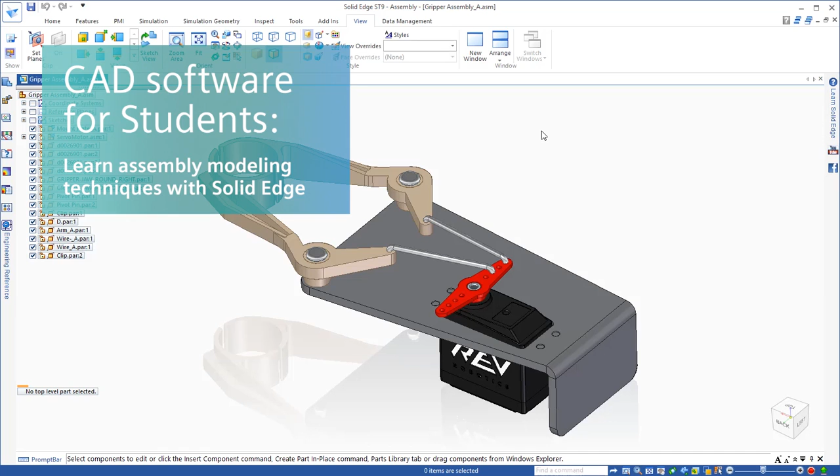In this assembly, I want to show you how we can use the power of synchronous technology to make design modifications without having to go in and out of parts. So in this scenario, you can see that I have a servo motor there. If I drag the servo motor, you can see that I can simulate the motion based on the assembly relationships

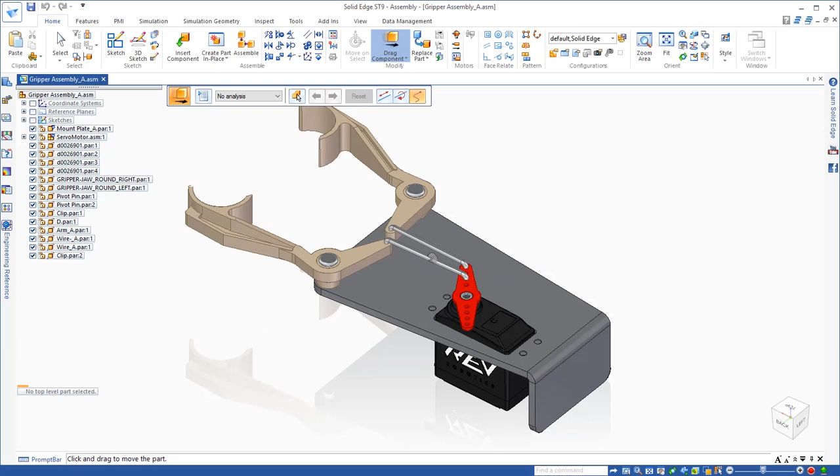between the parts. The scenario I want to test is if this wire was actually located in the second hole, how would it change the motion of the jaws? Now, to do that, I would have to go in and out of the part, the wire part, make it longer, measure the distance between those holes, figure out the distance. But I want to show you how you can do it very quickly and easily in synchronous technology.

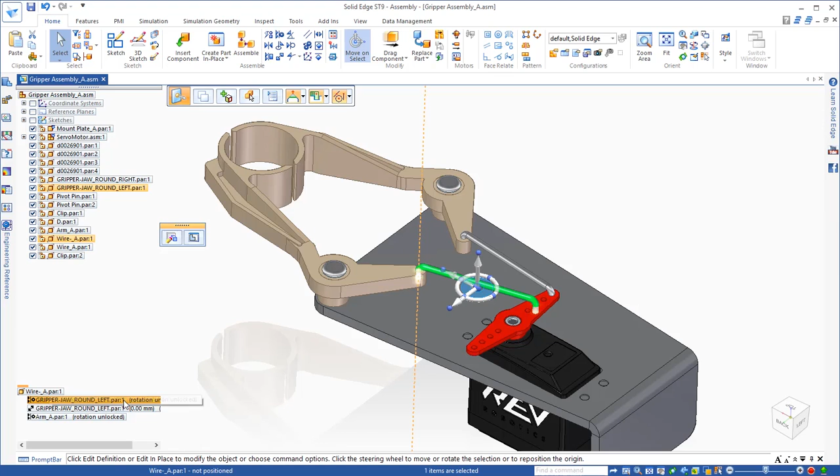So the first thing I'm going to do is look at the assembly relationships to that wire. You can see that there's a relationship here on the end, which is the one I'm going to be replacing. So I'm going to go ahead and delete that relationship. That's going to allow that wire to freely move now, or rotate about the jaw. So let's go ahead and use synchronous technology to make that modification.

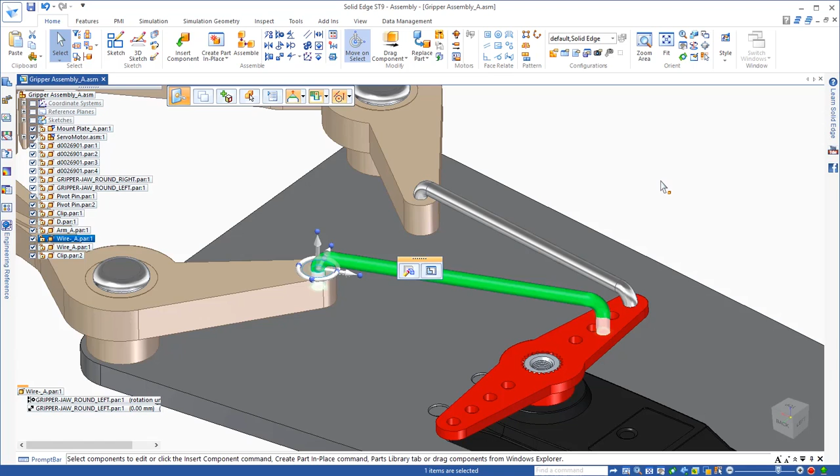And I'm going to do that just by relocating the steering wheel onto that end of the wire. And let's point the steering wheel to the other end. That just gives us a starting point for the rotation so that I can make sure that it lines up directly with the hole on the other end. So now we have it located correctly for the assembly relationship.

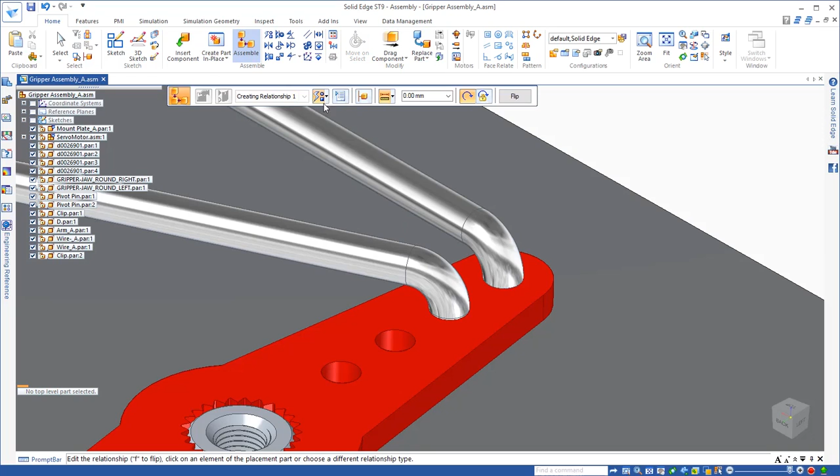Just like before, I can use the face relationships between parts, and in this case I'm going to be using the concentric face relationship to make the wire concentric with the hole in the servo, and it changes it and I didn't have to measure a thing. And then all I have to do is re-establish the assembly relationship between those parts. In this case, an axial alignment between the hole and the wire.

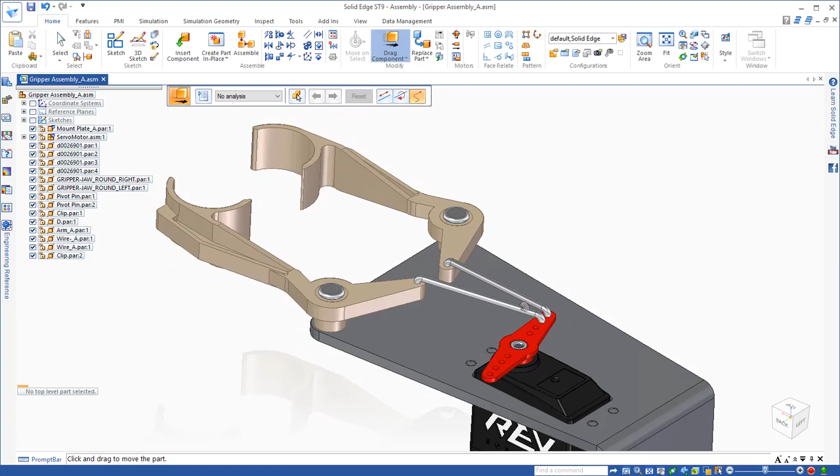Now that the assembly relationship has been re-established, I can show the motion again by dragging, and you can see now that that left jaw opens just a little bit wider than it did initially, being located in that new position. So again, very powerful to be able to make these modifications at the assembly level. It makes assembly modeling much easier with synchronous technology.